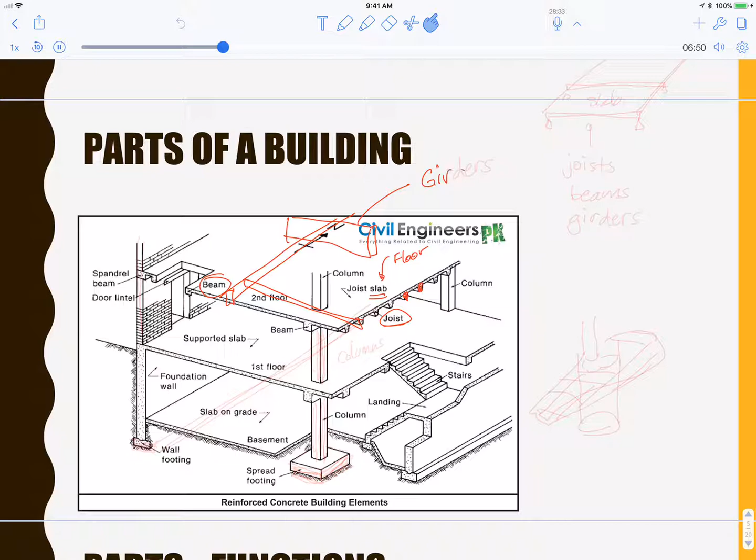Now, these joists, they go like this, and they connect to bigger beams going this way, and we could call those beams. Those beams could then connect to maybe something even bigger, and we would call those girders. So in the hierarchy of size, they're all beams, but we call it joists, beams, and girders. They're all things that we are drawing in this class to look like this. Joists, beams, or girders, just depending on the size.

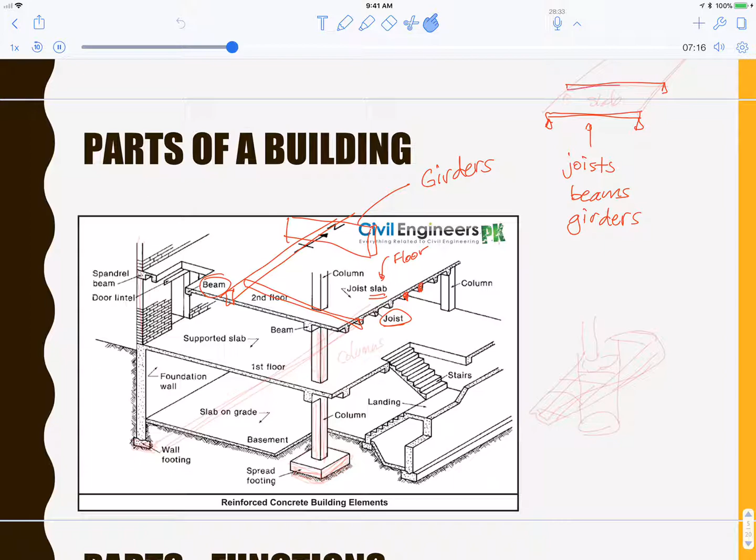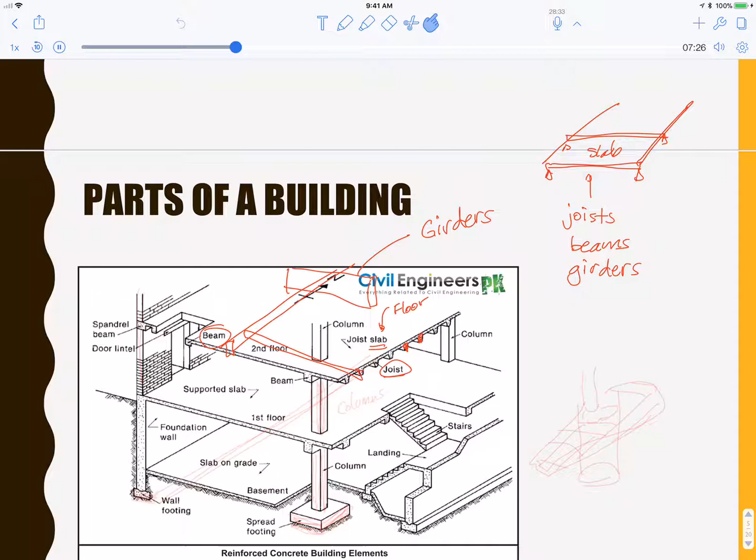And the part that goes on top of these things, so let me draw it in 3D. So here we have two joists or beams, and the part that goes over it that you actually stand on, we call that the slab. What keeps the whole system in the air are columns. Okay, so these are called columns. And usually the columns are connected to the girders. So it goes, slab is connected to the joist, joist connected to the beam, beam connected to the girder, girder connected to the columns.

Finally, the whole thing has to stand on the ground, and all the weight is in these columns, and these columns are like nails. You're pounding them into the ground. They would just sink into the ground. And so that they don't sink into the ground, you put these giant footings under them. And you can think of footings as like snowshoes.

If you were to step in snow, you would make a hole. And we call it post holing, because it's the same thing. If you put a post in the ground, it will sink in. Well, if you don't want to sink in, you just need a bigger area, so you would wear a snowshoe. Okay? And that area, this extra area, would allow you to stand on the snow without sinking in. In the same way, think of the column as your foot or your leg, and think of the spread footing down here as a snowshoe, and you're spreading the load out over the soil so that you don't sink into the ground.

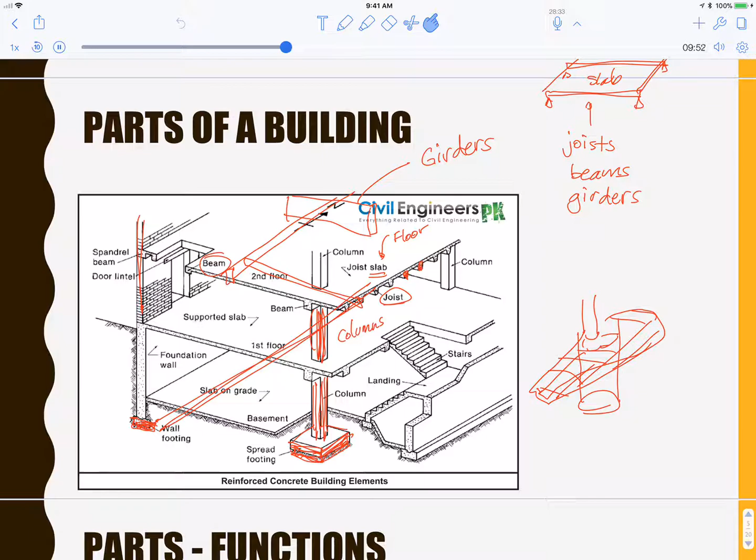And he said, shoe design, yes, it's at the bottom of the columns. And then I realized they had mistranslated footing to shoe. And that's actually what made me think of snowshoes. From then on, I think of footings as snowshoes. But anyway, that's what a footing does. Another way you can support loads, especially like walls, is called a wall footing. So you make it not so wide, but it's really long, and it goes under the wall, and that's enough area to stop the wall from sinking into the ground.

It's good for you to know the names and parts of a building if you're going to be a civil engineer or architectural engineer. But for this class, what you really need to know is what kind of forces are on the different parts of the building. And so the different kinds of forces that can go on a building is axial load, when you push along the axis of the member. That's why it's called axial load. Bending, so when you put moments on both sides of something like that, it's going to bend like this. Can you see that? Take a plastic ruler and you put two moments on it and it'll bend like that.

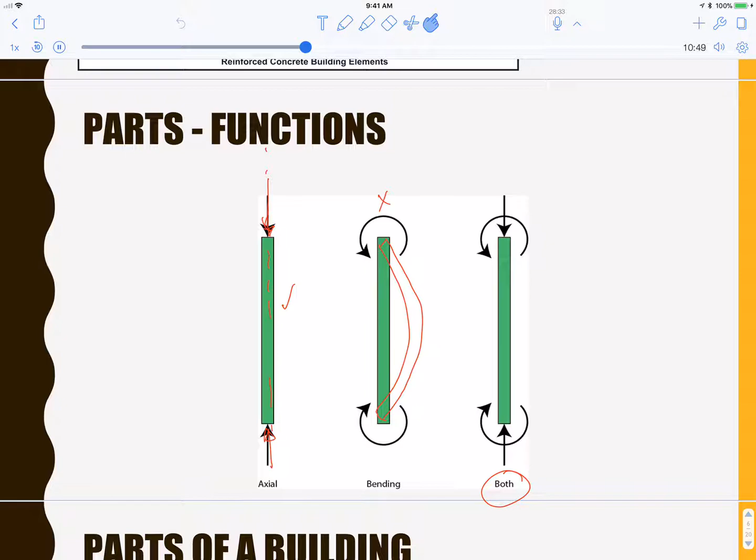And then you can combine them or have both. This is important in terms of the behavior. Most things are very, very strong in axial and very, very weak in bending, but the bending can't be avoided. Actually, it can't be avoided usually, but there are certain kinds of structures where there is no bending, and we'll talk about that.

So let's look at this building again, the parts of the building, but now in terms of what they're doing. The slab, so you can think of the slab as going over the joists. The slab bends. When you stand in the middle of the slab between the joists, you're making it sag. The joists, okay, so the joists that are going like this, they bend like this, so they bend. And finally the beams, which are going this way, they're a little bigger, they're just bigger joists, and they are bending.

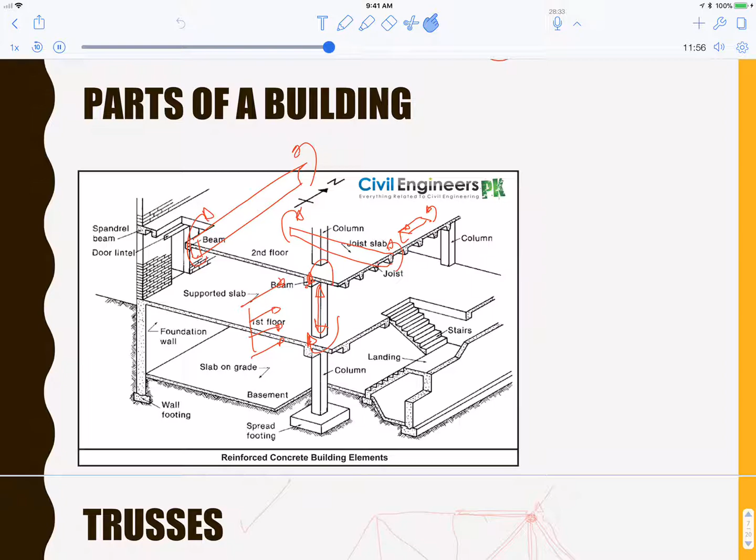The columns, however, okay, so the columns are in axial. However, if you combine the gravity loads with wind, and so remember, wind pushes sideways like this, or earthquake, you can get in columns, in addition to the axial, you can get moments like this due to the sideways forces, or what we would call lateral forces.